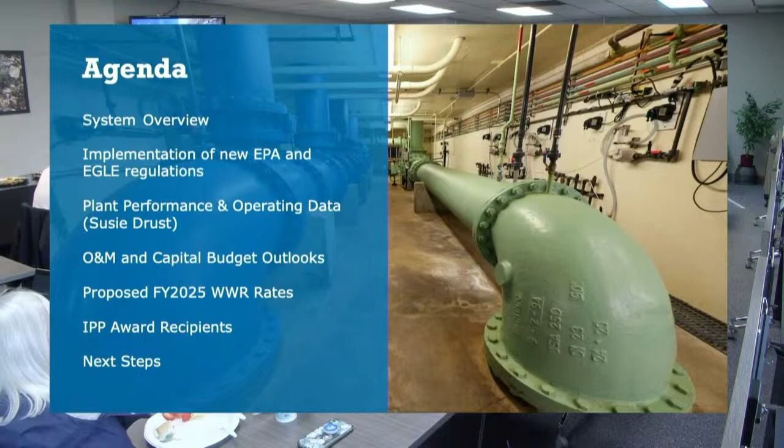So just going into the utility overview, this green polygon on the screen represents the areas that we serve. Many of you here today are your own wholesale entities. You provide service to your own customer base through retail agreements, or retail agreements that you have with others.

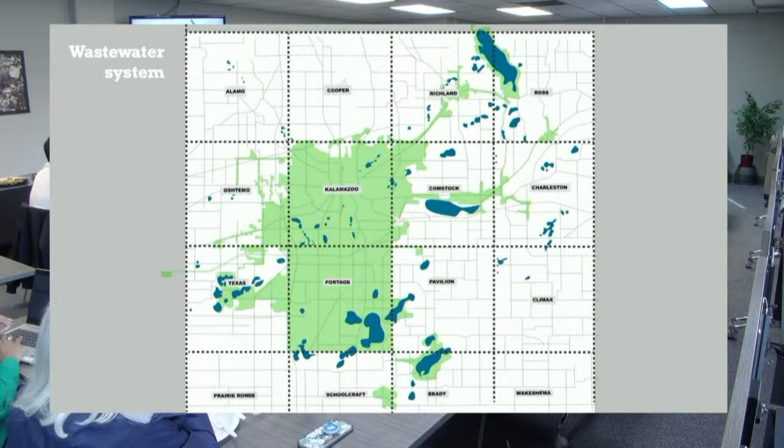So your area may be a green blob on this map. So all the green blobs on this map all come to this site, where we're all sitting here today, for treatment.

This plant is unique. It is the only plant in the state of Michigan that has powdered activated carbon treatment. This plant was specifically designed and built to handle the type of waste streams that it receives.

So there's a lot of unique characteristics there. This plant also has an EPA exemption for pharmaceutical waste that provides us the ability to treat that.

So every hour, 24/7, 7 days a week, 365, including Christmas Day, there's a million gallons of wastewater coming through the door of this facility.

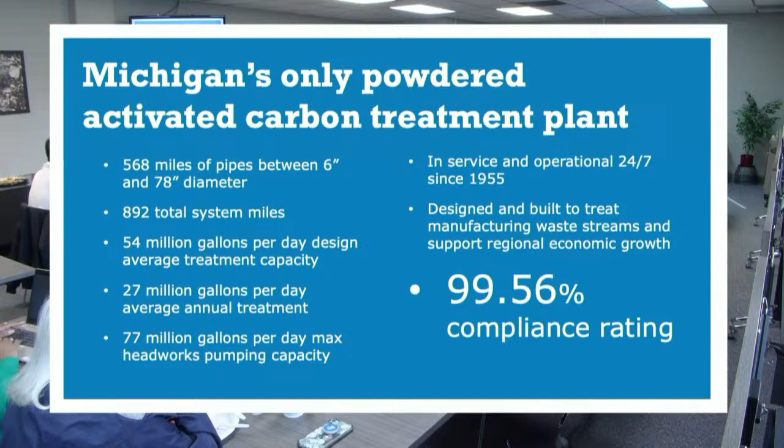And so that's really going to speak to a lot of the reliability and operational performance criteria that we've got to make sure that we're meeting, so that we can treat those waste streams.

And so that we can treat it to the highest regulation requirements and treat it and provide it to the Kalamazoo River.

In terms of system capacity, we're going to talk quite a lot about this. This has been something that's a bit of a changing landscape for us. We're actually going through an evolution now through changes with our permit and changes with EGLE.

We're moving away from our historic kind of hydraulic nameplate capacity, and we're getting into capacity of individual pollutant parameters. We're getting into treatment capacities of pollutants and specific capacities for things in our sewer use ordinance.

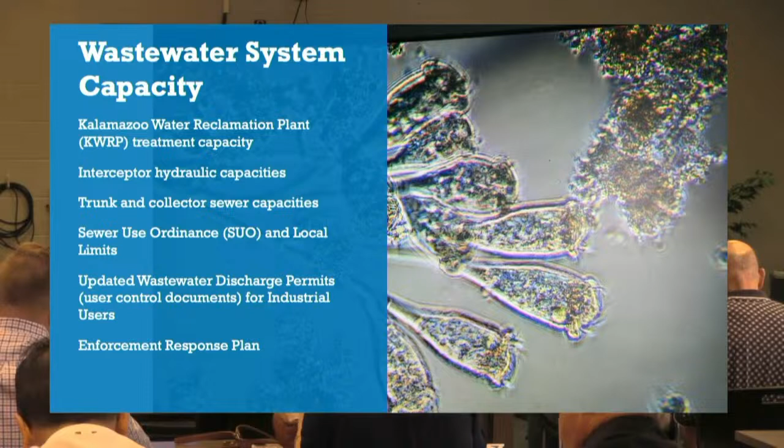So we're going to kind of go through that and kind of walk through that so there's some broad understanding by everybody.

Going back in time, back to 2017, we were issued a new permit, and that new permit required several things. It required, first and foremost, that the City of Kalamazoo conduct a MAHL study and that we incorporate a MAIL.

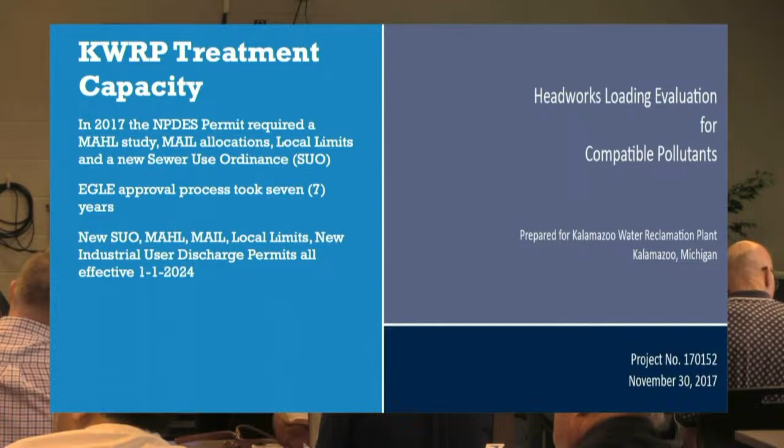So that was a maximum allowable headworks and loading study that had to be incorporated, and then that MAHL then informs the MAIL. The MAIL is the maximum allowable industrial loading.

So if you think of it like a pie, essentially what EGLE is saying is that the whole pie is going to come into your facility. That's going to get regulated and controlled.

And then of that pie, you've got pieces for what we call background, which is our residential customer base, quite often referred to as our retail customer base.

And then we have industrial loadings, which are our big industries, and then our septage customers. So those slices of those pies are limited, and they're limited based on our performance and study.

Getting into some background of that, the way the plant's configured today has had a few modifications to it, but broadly speaking, we're the same plant that went through a basis of design back in 1979, and went through actual engineering design in 1978.

During those original designs, we had loading parameters that we established and based our treatment capabilities on. With the MAHL study, a lot of these things changed, and so we ended up getting down to an enforceable MAIL of only 168,000 pounds for BOD.

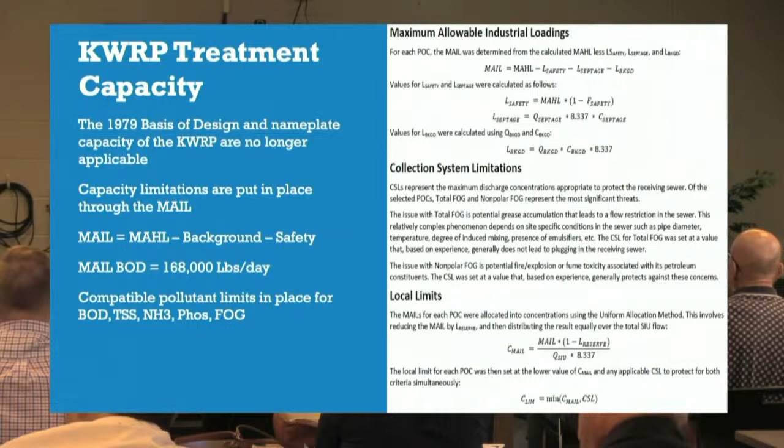Now, all compatible pollutants were updated.

Those industries that are here today, you see those in your new permits, and we're going to be talking about some of that. But broadly, there's been a major change from where we are from nameplate capacity to where we operate today, looking at capacities in each pollutant parameter. So one of the things to highlight: 53.5 million gallons per day, that's our nameplate capacity. We're currently sitting at about 27 million gallons per day of actual flow that comes in our door.

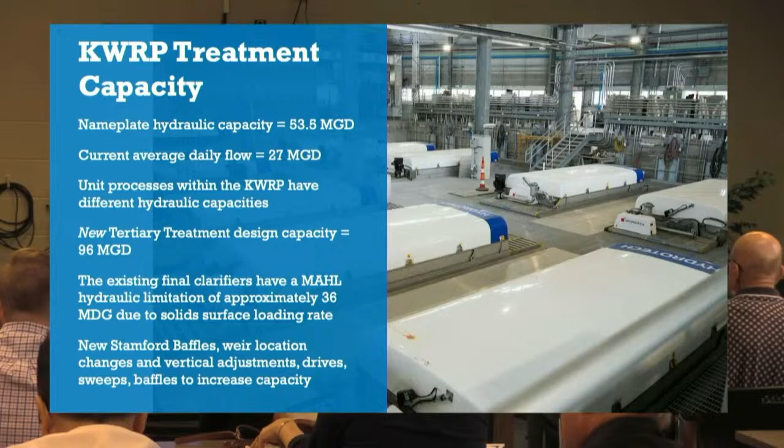We just completed, and you can see the building behind us, a new tertiary treatment system. That's a picture of it there behind us. That system was built to withstand a hydraulic flow rate of 96 million gallons per day. So you can see we're maintaining and enhancing our hydraulic capacities, and we're having to do that because our organic loadings are much higher. We've got some additional projects we'll talk about in the capital plan that will help bring up those loadings so that we can restore and reestablish some higher levels into the future.

We also want to touch on wholesale industries and our townships. We have IJAs, interjurisdictional agreements. Those agreements are essentially in the process of getting rewritten. We've got a requirement from EPA to rewrite those. We also have been working with a group of our township folks represented by the Regional Commission that are helping us negotiate new long-term agreements.

Those agreements are well through the process, and we wanted to highlight that flow and loading is not a limit of those agreements. So those agreements do not limit loading, they do not limit flow. Flow and loading are limited by the physical capacity of pipe in the system and where your discharge point is. However, industries are regulated by that.

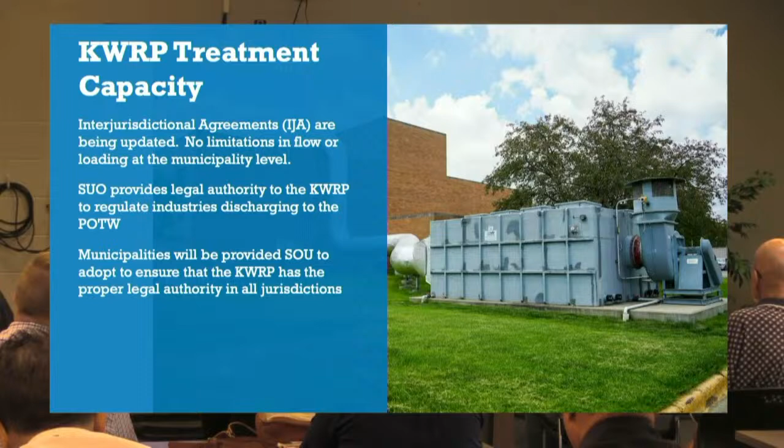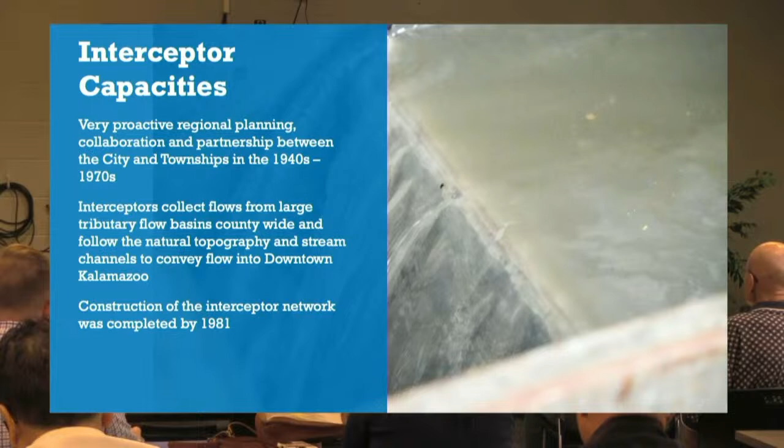We have a vast interceptor network that was built through a lot of great partnerships by many of the communities sitting here today, many of the townships, also supported by Kalamazoo Board of Public Works. That interceptor network was built from the 1940s and completed in 1981. It remains extremely strong and viable for future flows. In fact, that interceptor network flow capacity is greater than our pump capacity. We've got an ability to pump 77 million gallons per day here at this facility, and one of those interceptors can flow more than that.

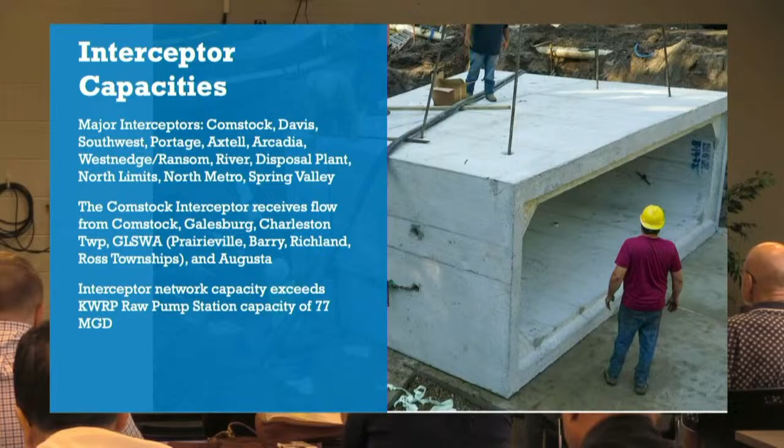The river interceptor, at half full or a third full, can flow something like 54 million gallons per day. We saved you from having to look at it, but we've got a spreadsheet that shows all the interceptor capacities throughout the entire system. We're nowhere close to exceeding that. That's good news in terms of capacity and future capacity of both our industrial users and our wholesale providers.

Some of the tools we've got in place to help monitor that interceptor network is a real-time smart sewer system. We'll be sharing logins and how to access the system. Your engineers are really going to be excited by this program. We spent about 3 years developing this, and we've got sensors in manholes all throughout the system. Those sensors monitor flow—you've got a pipe, you know the diameter of the pipe, and you know the grade of the pipe, meaning the angle it's sitting at.

And we measure the flow. We can tell you how much flow is in that pipe, the height of flow, by using Manning's equation. Not 100% accurate, but it's as accurate as most engineers get in terms of monitoring flow in gravity sewers. It's a great way to check on the system and monitor it in real time. That system is now running in the background, and it will alert our engineers and staff if we have an area where we see a blockage occurring.

We responded to a blockage of the southwest interceptor along a railroad and low-lying environmental concern area, which was a swamp—something we don't want to have sewer overflows go into. We were able to go out there and remove the blockage before it became an overflow.

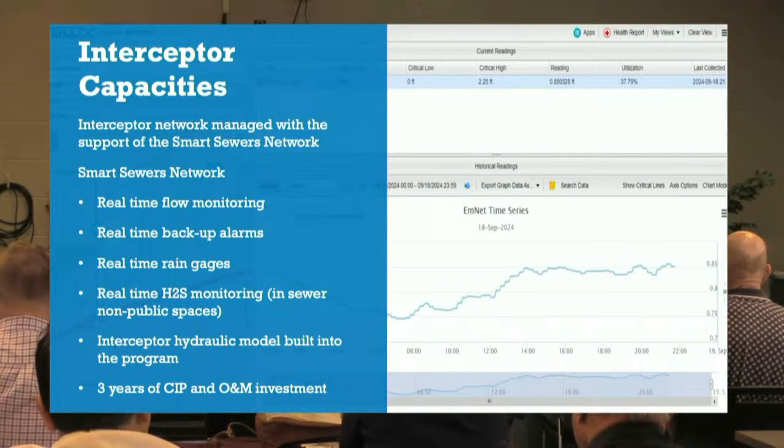That can really help in real time when we're looking at flows that are coming in, high flows at lift stations. It can also help us in future planning as our engineers are looking at spatial distributions of rainfall within our area. If you're into rainfall, if you're into weather, you'll know that Kalamazoo as a county doesn't always receive the same amount of rain over the same area. That rain can be really variable throughout the storm events.

So overall, this system has been extremely beneficial for us. We continue to learn new features of it and employ new features of it, and it's something we're going to be sharing with our engineering partners in the townships as well as we continue to roll that out.

Another program that we have, just to touch on it, your regular 8-inch sewer that's down some road somewhere, that sewer's got a finite capacity just based on its size, and we've got a program over on the water side of upsizing.

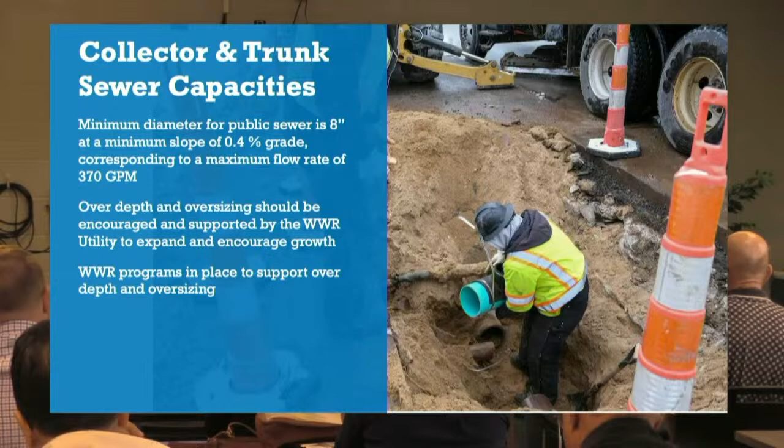We also have this program in sewer. This is a program that we're also going to be pushing with our partners in the townships, that if you're planning an area that is going to experience changes in zoning in the future, maybe that area is going to become a commercial area, we should talk about considering going deeper with your sewer and maybe going larger diameter with your sewer so that you can serve more customers in the future.

So kind of bringing it back to that term regulated capacity, we had a whole host of regulatory enforcement actions that took place in cooperation with EPA and EGLE. That all went into effect on January 1st of 2024.

So we've got a new sewer use ordinance, and if you look at our new ordinance compared to our previous one, our previous ordinance was about 30 pages. Our new ordinance is about 180 pages, I think. So it's quite a difference.

That then opened the door to establish new local limits. We've got new dewatering discharge sampling requirements as well. PFAS has been a big issue for everybody. We now regulate and control how much PFAS you can put into the sewer system.

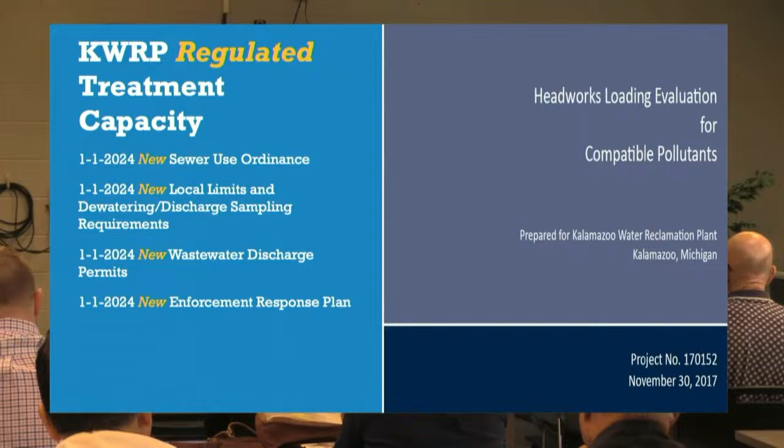We have a PFAS limit here for our headworks loading. We're only allowed to load the headworks with so much PFAS, which means that we can only put so much PFAS in the pipeline. We just built a new GPI pipeline between us and GPI. That was a $3 million pipeline.

We got the results back for dewatering the analytical and discovered that there's PFAS above our headworks loading limit. We had to bring in a temporary filtration system with GAC treatment to dewater to support that project. That added another $1.4 million to the project. So a $3 million pipeline became a $4.4 million pipeline just because of PFAS regulations.

And I know that's happening, that those kind of things are going to happen to industries as you guys look to expand, and that thing's going to happen continually in construction in areas that are building in brownfield areas or building in contaminated areas.

New wastewater discharge permits, so everybody here on the industry side of the house is operating under either a brand new permit or a permit that's going to get superseded by a brand new permit, which will have new requirements. There's a whole new set of requirements for slug discharge control plans, for spill response plans.

Some of these things are very different. Some of you industries have been with us as long as you've been in industries and have been doing it the way that we've used to do it for 40 or more years, and that's all changing now. So this has been a very steep learning curve for many of us, and we're continuing to get through it together.

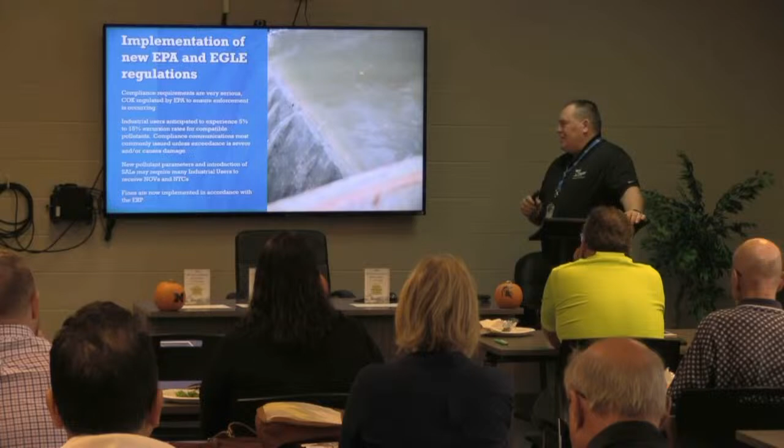We also have our new enforcement response plan, which provides guidance on equalized enforcement across all the different industries based on what type of situation it is.

One of the things we wanted to highlight in terms of compatible pollutants is that most every industry was designed based on our limitation of MAIL. If you remember, our MAIL, maximum allowable industrial loading for headworks for BOD, was 168,000 pounds. So that's not a lot.

That's getting spread pretty thin across all the industries. And that same story goes for solids, ammonia, and what's going to happen in 2025 is phosphorus. That's already in your permits, so that's getting regulated right now. So those limits are spread thin, and we anticipate that most industries will have somewhere between a 5 and 15% excursion rate on many of those things.

So most excursions, if it's a compatible pollutant and it's non-severe, so there's no impact, no harm, those are usually handled with what we call compliance communication. If there is an exceedance that's severe, or that exceedance causes damage or harm, then that compliance communication would be a NOV, a notice of violation.

We've got all those new pollutant parameters that we talked about. Some of those are requiring SALs. You might have an industry like a metal finisher that now has a limitation for phosphorus. They didn't before, and now they're having to have an SAL, which is a special allocation for loading.

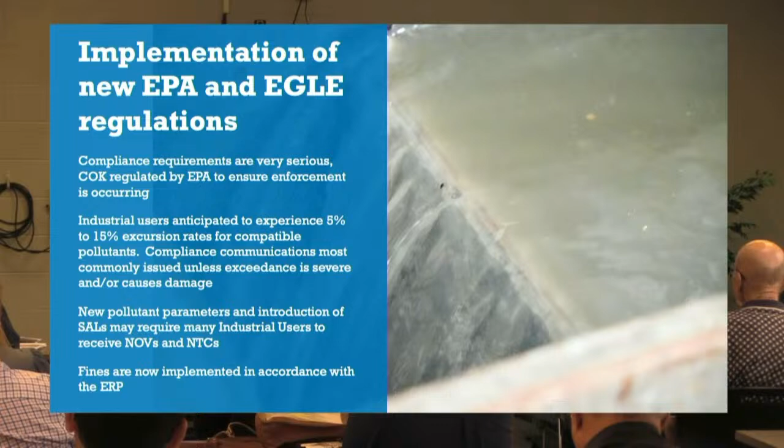Our minimum fine is $10,000. We usually always try to fine in abeyance. So if you get a fine in abeyance, that means we're going to hold that fine and suspend it while you conduct action in your NTC.

So you've got a notice to correct that says we need you to install a meter, or submit some reports, or do some sort of action. If you complete that action, then that fine is not administered. We also have industries that were unable to meet that requirement, and so that fine did get administered.

Jumping over to some O&M and capital budget outlooks, we want to talk about what are some things that we've been working on at a higher level with some of our other partners. I'm talking a little bit here about our rate negotiations that we've been working on with our regional commission.

So there's some fundamentals that we're working towards, and some of those are an equalized rate concept, embracing regional cooperation, looking at this instead of 22 independent systems. We really try to look at it as one broad system with one common goal.

Our common goals are to provide clean, safe treatment, so that we're protecting the environment. Ultimately, that treatment is what we're after. We're also after following EPA regulations on the industries and everything else, and then just kind of that simplified process for providing that service to the public.

And if we look at this as a system and we embrace the concept of broad economic growth as a region, we can really look at having a goal of long-term economic stability and growth across entire Kalamazoo County.

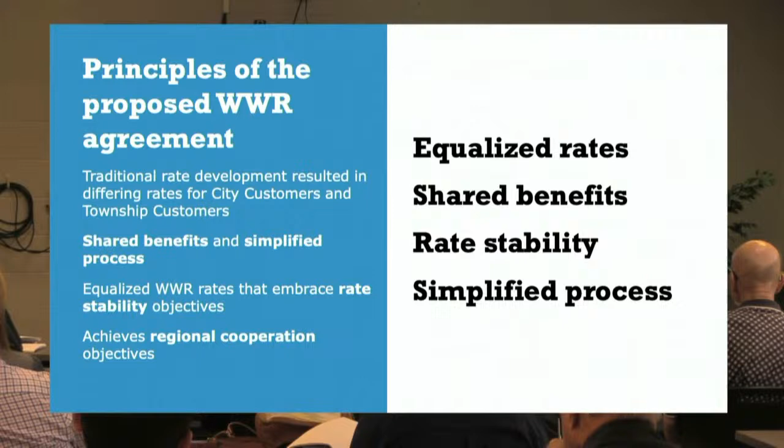So there's a lot of words on the screen here. I'm not going to read them to you. This information is taken right from the rate report.

It really talks about these three main concepts in rates that have been kind of controlling things. One is where we allocate costs for collection systems, and we're providing some updates on that. The other key concept is what we talked about, an equal rate concept of providing the same level of treatment for everybody, and then embracing that concept across all the user classifications.

So we talked about we have retail users, in-city and out-city folks that participate in retail. We have this group, largely represented by wholesale service providers and retail service providers to others, wholesale to us, retail to others, and industrial users. These same concepts are being applied across everybody. And then the other concept within that is the concept of rate of return.

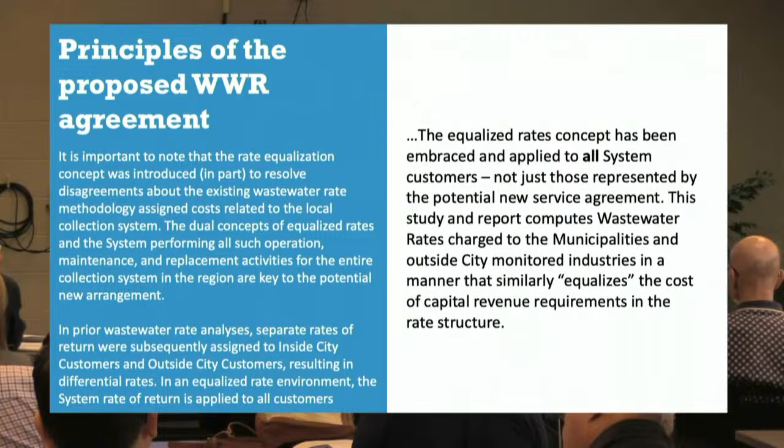If you take the rate of return requirement and spread that out across the entire system, it provides broad system benefits, as opposed to a rate of return requirement only on a certain customer class, so that it provides better equity across that system. Those are the rate fundamental changes we're working on that will help the overall system create this concept of equalized rates and a regional approach to the service we provide.

Drilling into some specific areas of level of service, we see chemicals, including odor control, are really starting to increase. We're spending upwards of between $5 and $6 million a year on chemicals now. If we go back to 2018, that number was closer to about $1.5 million a year. Odor control is a big portion of that.

We've got new carbon scrubber units that are part of all the processes here in wastewater. That was an upgrade we made a few years ago, and we continue to support that with annual investments and carbon changeouts. Changing that carbon out costs $600,000 annually to refresh that carbon. So that's one component of that.

Sludge disposal, we're going to talk some more about that as we go through the slides. That has been something that continues to increase year over year. Again, if we go back to 2018, we were looking at $4.5 million a year on that. That contract stayed with us through 2020, and then we've been jumping ever since.

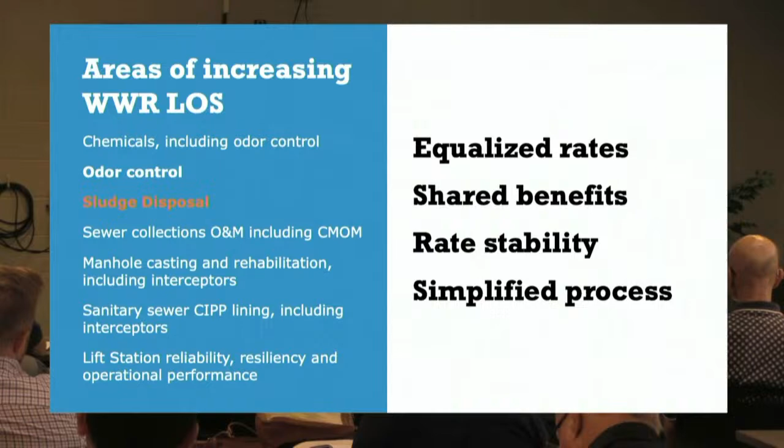Some other work, really kind of focusing on those sewer collection systems. We take all of our systems and add them all together. We've got about 900 miles of sewer pipe in the ground out there. So that smart sewer system helps us keep an eye on that. We know that folks in your own retail areas are providing an eye on your stuff. And with our agreements with the townships, we're going to be doing some sanitary sewer lining and a lot of rehab work on that in years to come.

One of the things we wanted to show you is where the work is occurring right now, and we ask ourselves this question all the time. We've got over 15,000 assets in the asset management system in Blue City. We've got work orders every day. The TOSs in the room can talk about how many work orders we do and how many are assigned to the different units. There's a lot of data and information out there that can be overwhelming at times.

One of the other things we realize is that we all drive vehicles to go to work assignments. Nobody walks out to Augusta to check on the lift station. We take a vehicle, and every one of our vehicles is coded by department and GPS to the driver. So we can go to our GPS system and look at where our vehicles are going on a yearly basis.

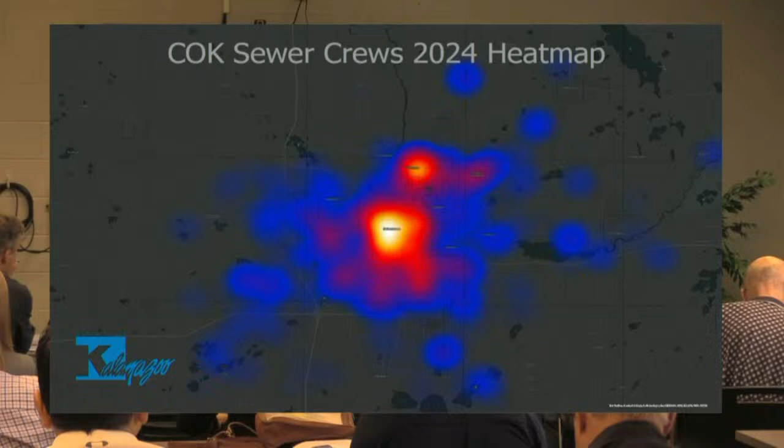So this image is a heat map. This shows you all of our 4-dash vehicles, which are owned by and assigned to the sewer department. This is everything from Badgers to pickup trucks, it's got a 4-dash number on it. So you can see it's got some heat signatures of where that work's happening. You see we've got strong representation in kind of the core city, downtown.

We're up in the north side, this is section 10, this is section 15, down here section 26. These are kind of known areas for older sewers, clay sewers, and roots. These are heavy tree-producing areas. We're up here in Parchment quite a bit, and then you kind of see dots where we're out touching everybody. You can see we're lighting up areas. Most of those areas where we're lighting up are lift stations or areas like where interceptors are, areas where we're out doing direct work.

So we actually got one of these infographics for our streets department, we've got it for our sewer department, we've got it for our water department, so we're able to look at, from an annualized basis, where that work is occurring, just from a high-level snapshot of what's going on. We do have home base here at the Harrison facility, and there's a home base at the Stockbridge facility. We deleted all those endpoint trips from this overlay so that won't skew the data. These are actual trips, except for Harrison and except for Stockbridge.

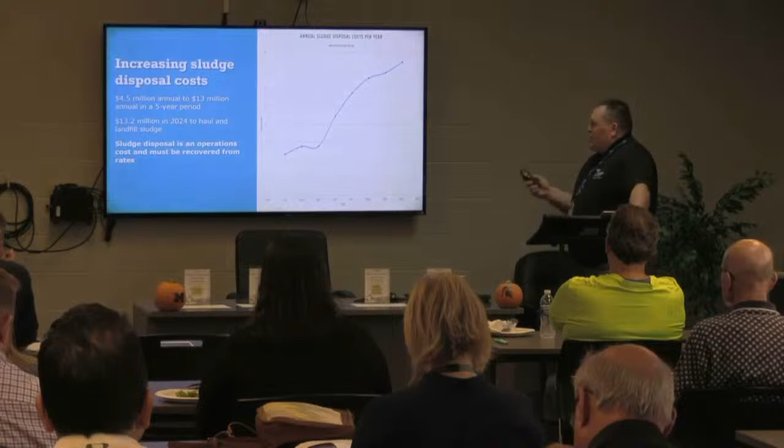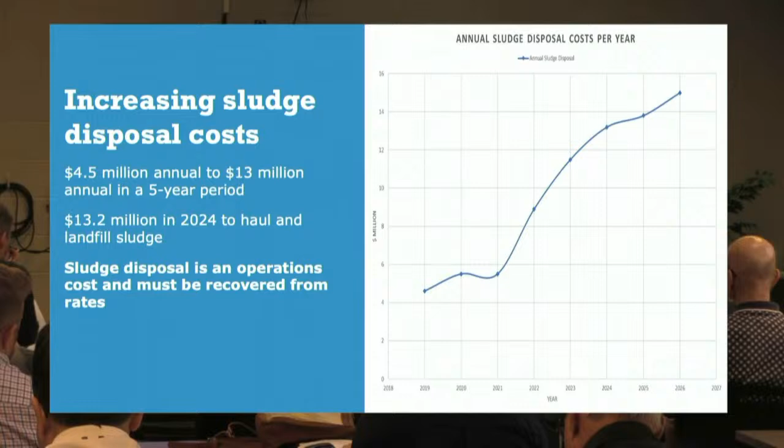Getting back to sludge, we're up to $13.2 million a year last year. That number is even going up. That's an operational number, meaning every year we're going to have $13 million come in just to deal with sludge disposal. We've been working on a process to really get after a new plan for sludge disposal. We've got our Sustainable Biosolids Committee, and we've got a good governance group working on that. That group is going to meet again on November 13th.

Essentially we had 30 technologies that submitted to our RFP, so we worked first last year to narrow that down. We got that down to 3 different technologies. We've been doing some homework on those technologies to provide better understanding of cost, better understanding of capability, and better understanding of emissions requirements in terms of what we're going to have to add to that equipment to ensure we're at zero discharge for any kind of polluting parameters into the atmosphere.

We're going to meet again and come out of this meeting and provide some updates. But where we're really going towards this, right now, we manage a wet product. So we have liquid sludge. That liquid sludge goes through a centrifuge process. Susie's going to talk a little bit more about that. And then we dry that out.

We're, on our best day, still only drying to 23, 24% solids, which means there's 77 to 76% water that we're hauling. We're storing all that wet material on our site. We're consolidating all that wet material on our site, and we're transporting all that wet material through our neighborhood. So we know that we've got to transition to managing, transporting, and consolidating a dry material - a dry material that's free from odor, free from any sort of vaporization or anything like that it can give off.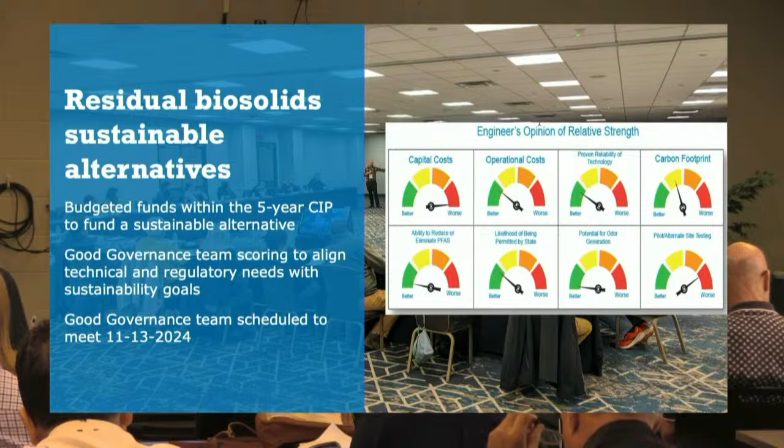Some other capital improvement focus that we have - we're really going to be looking at lift stations. We've got a whole new panel design. We're taking the panels and putting them out at many different lift stations. I know Charleston's got some new panels. We've got 65 lift stations in the system, so they're all getting new panels.

We're working towards getting generators at every single lift station. We went through the ice storm in 2023 - we had a real strong realization that we only have 3 licensed electricians on staff. And so for us to send a licensed electrician back to the staff, if I've got a lift station down in Texas and I've got a lift station down in Augusta, there's a lot of driving that has to occur to get that electrician between those stations.

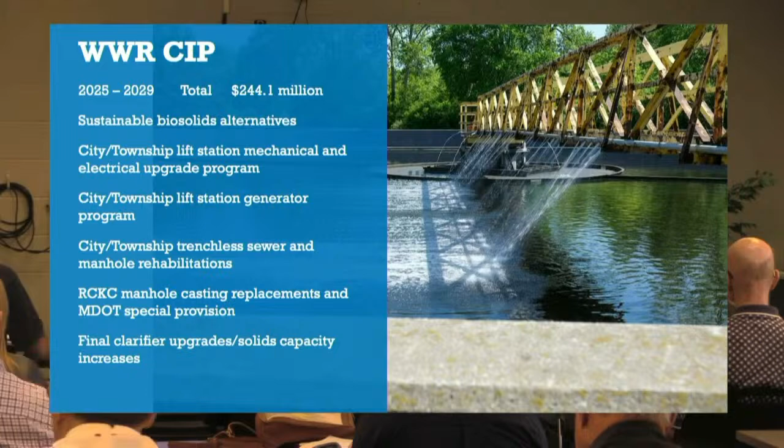And so if we can get stations to operate reliably by themselves without a lot of input from our electricians, then that's going to provide overall reliability to our system, and then our electricians can stay here in the plant and focus on the big picture aspect of keeping SCADA up and running and keeping the treatment plant up and running. So getting into rates here,

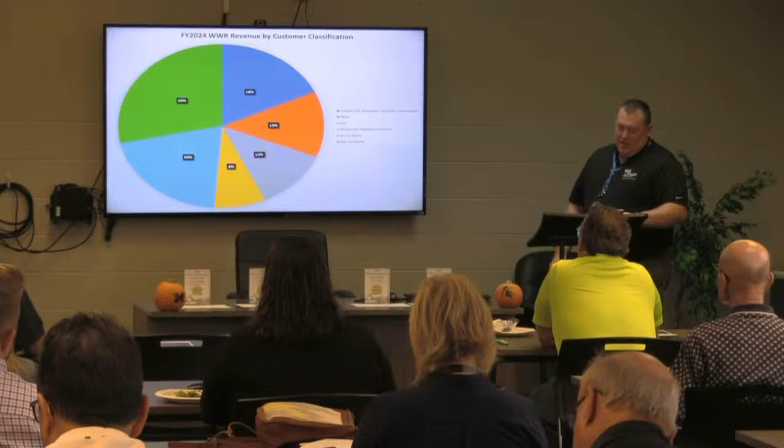We wanted to share with you this pie chart. It's broken up into all the different pieces. Broadly speaking, everybody that's in the room today represents about 51% of our revenue requirement. We've got GPI and Pfizer together representing 25% of our revenue requirement. We add in the wholesale communities like Gull Lake Sewer and Water, Vicksburg, Portage, those folks - that brings in another 18% of that represented class. And then we've got the remaining industries that bring up about 8%. All summed total, it's about 51% of the revenue, leaving 49% of the revenue to all the retail organizations, which would be City Kalamazoo retail, and then all the townships that represent our retail communities.

What does your rate pay for? This summarizes our 3 buckets of cost: treatment, collections - which we call local collections or local collector sewers - and then we have the interceptors. In terms of this group, which is largely those wholesale communities, everybody pays for treatment and everybody pays for interceptors. Now, if you're an industry and you're located just in town and you're in one of the retail areas, you would also pay for the local collector sewer. And if you're an industry and you live in the city, you'd also pay for that retail aspect of it as well. In total, it's about $40 million of cost.

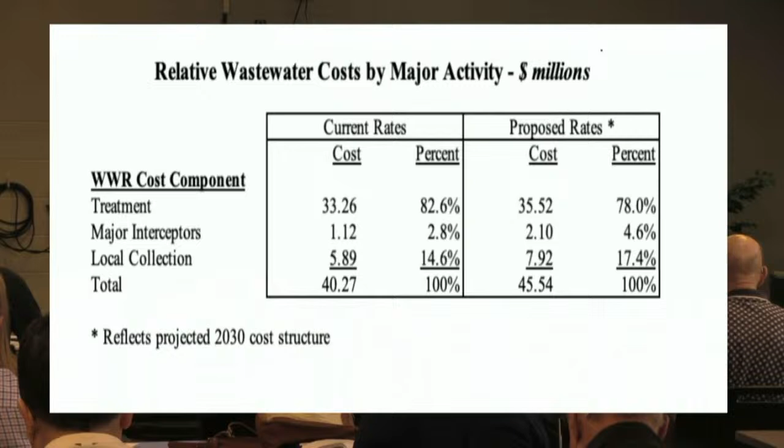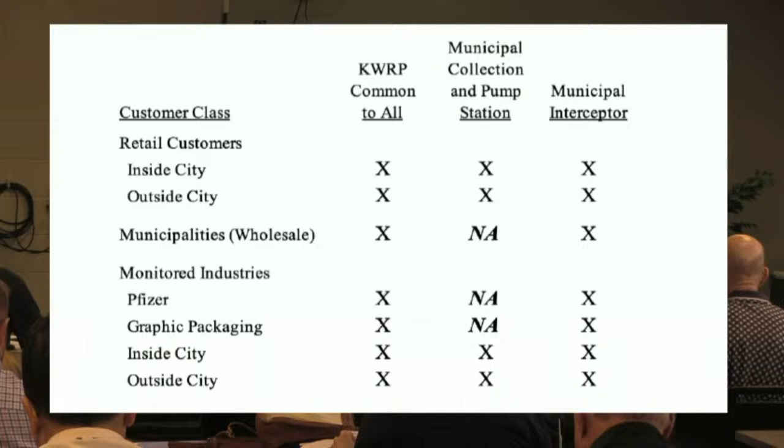We calculate this based on the removal performance of each one of those, talking about it from the operations perspective. Within our budget, we've got an operations portion assigned to treatment. We know these are kind of the main goals of treatment. We can go through each unit process and see how it performs using actual empirical data of removals, and those removals then tie back to actual costs. So we've got that shown.

We've had major changes in cost allocations over the last, I'll say 6 years. If we go back to when solids disposal was $4 million a year, some years $3 million, when we ran filter presses, we didn't have a lot of costs with solids in the grand scheme of things. Today we're on centrifuges with sludge disposal costs pushing $14 million a year — much higher. So those costs are starting to shift from where they were hydraulically centered, now towards being more focused on individual parameters.

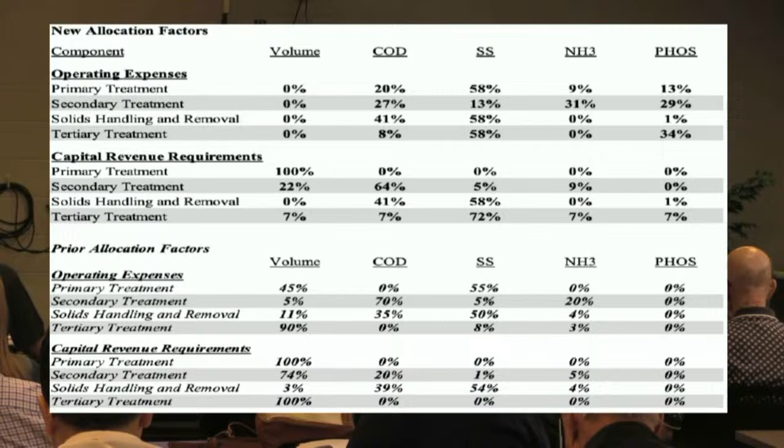So early on we talked about rate methodology changes, and how those changes were really goal-driven for an equalized rate concept across all customer classifications.

We talked about major changes in level of service and how that's driving costs in chemicals and sludge disposal. We talked about future reduction in operating revenue because we're going to build a sustainable biosolids solution so we can transition from managing a wet product to managing a dry product. When we do that, we're going to realize dramatic reductions in operational costs. We'll have capital costs, but those are spread out over a bonded period, whereas operational costs are unique right now.

So those are changes. We also have overall changes in operational and capital cost allocation factors — just talked about that, that's this sheet right here. And then changes in customer classification, proportional use, and distribution.

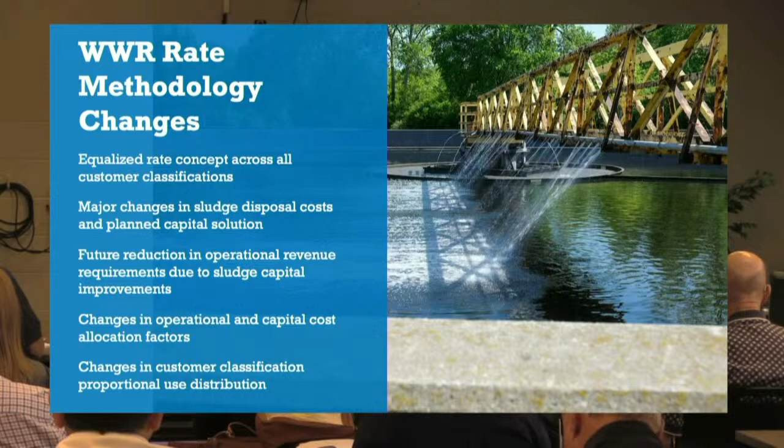That's what we talked about two slides previous, where you can kind of find yourself, municipal provider, what products are offered. Everyone gets treatment, everybody gets collections, or sorry, everybody gets the interceptors. So we throw all that on the wall and go to calculate rates for next year.

We get some numbers we might not like, and some of that is due to those changes. When we first did this, we calculated a rate increase for City of Portage, I think it was like a 46% increase. And we said, well, Hender's not going to like that. Not to pick on Portage, but that was pretty much across the board for everybody else. Pfizer, GPI, everybody had similar numbers, and so did City of Kalamazoo. We had numbers that were very high double digit.

So we worked with the rate consultant and said, okay, what's going on here? What can we do? And really it came back to, because of all those factors I just talked about, the instability and costs that are really driving operations, mainly due to sludge and all those other factors I listed, just looking one year out doesn't really solve anything. But in time, when that sludge solution is embraced and put into operation, that saves money. So let's go to that year.

So we use what's called a future test case year. We're setting rates in 2025, but we're going to pretend that it's 2030 and set rates for that year. Then we're going to back ourselves out of it year by year by year to get to where we are today. And when we do that, we provide what's called a 6-year glide path. We see a major mellowing of those rates.

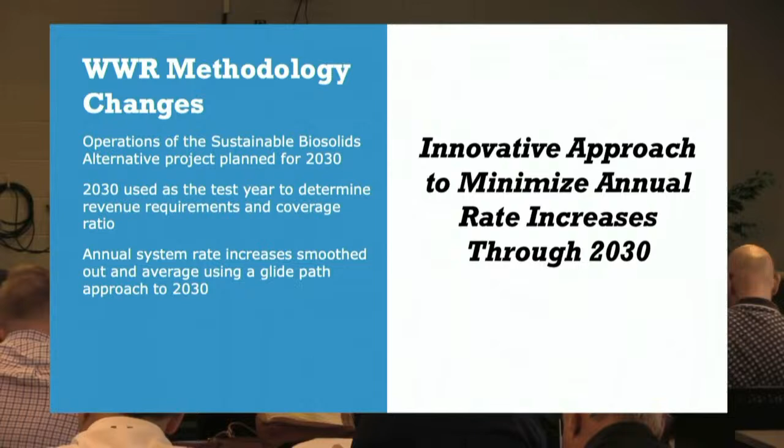I picked on Kendra earlier, so I'll give her the good news. It's down to, what did I say, 11.9? 10.9%. So, you know, great news with that.

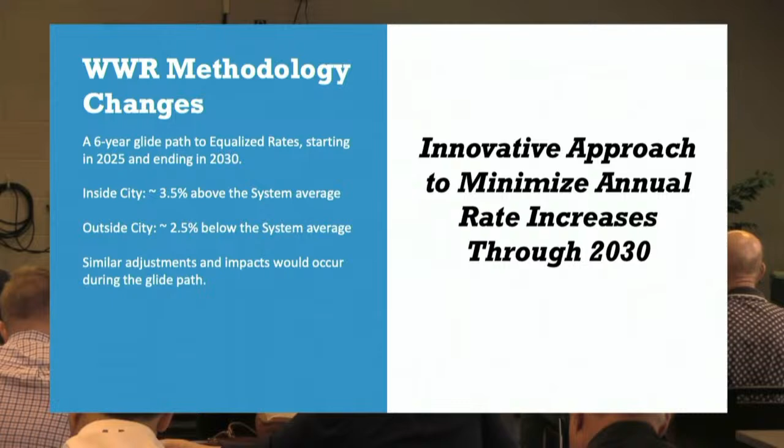Across the top here is that system rate increase. So most of the wholesale users that are in shares, you're impacted by the system rate increase, and then whether your individual flows are going down or up based on your 2-year trend. So if you were looking at a system increase of 12%, and your flows were static, you would have a 12% rate increase. If your system flows were going up, then that would be proportional to that. There is some smoothing between in-city and out-city rate.

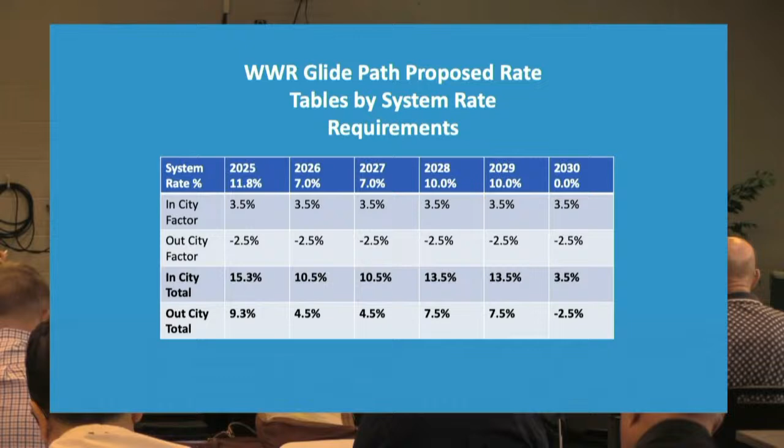You're seeing that. We talked about those retail groups. It's a little bit different cohorts than what's here today, but I appreciate that we may have audiences online that may be interested in that as well. Some smoothing of that occurs due to that overall matching of level of service between retail entities and balancing of those collection costs that we're going to be providing collection services in the township areas as well, and capital investment occurring that's getting balanced across all user bases also.

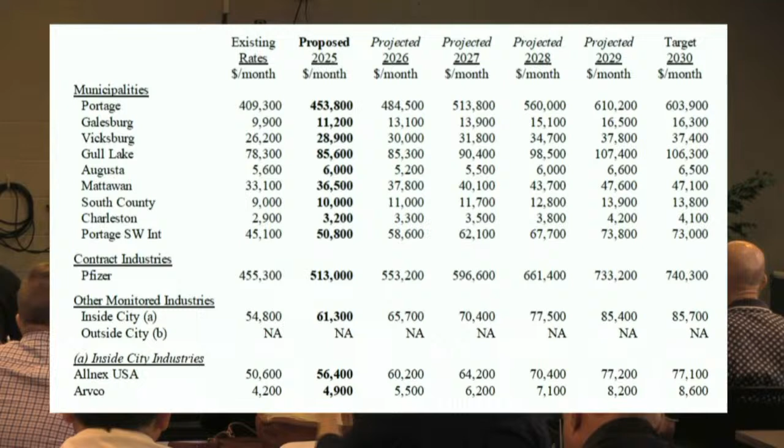So that balances out. You see this is a projection. Everybody should be able to find themselves on this list. That proposed monthly rate is here in bold, and it shows you all the way out to 2030. So a different way to look at it, but this shows you what your actual percent is if you're interested.

Pfizer, 12.7%. Good news, you know, you're right in there, maybe a little bit of a flow increase, but mainly that rate is carried on the system increase, and that's a whole heck of a lot better. We're talking about a 30% increase before - I would have had to give a better lunch if we were talking about a 30% rate increase.

Big winner, I think Augusta, 7.1%. I think we're still working with the flow meter there. Augusta's flow kind of dropped off when we installed a new flow meter. So if that holds true, Augusta's going to kind of go down and stay low. Gull Lake Sewer and Water has been slowly increasing, and every time we put a new flow meter in, it increases. So John probably doesn't want us to put any more flow meters out there.

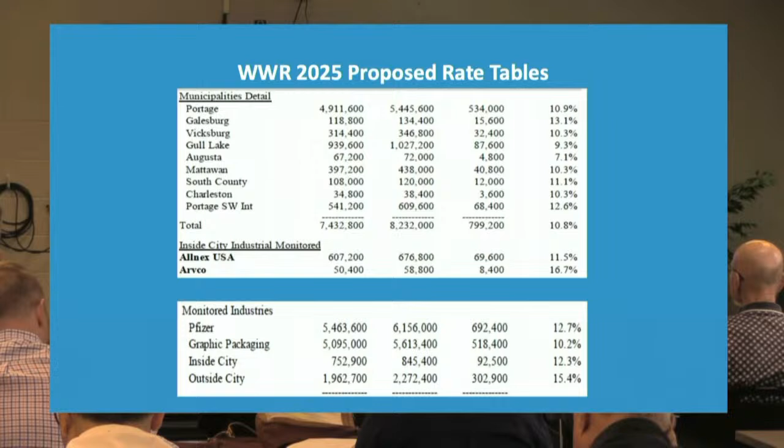Mattawan's been increasing, Vicksburg's been increasing. We're seeing that there are areas in the county that are getting housing increases where flows are starting to go up. Nothing big, but proportional with growth, and overall, probably good news.

Again, this is good news. It's a good news conversation. I know that looking at 10% rate increases is probably never good news for anybody. But if we really look at the investment that we're planning, we've got a $300 million capital improvement program that we're focusing on over the next 5 years. This really is a good news program.

Just a quick update on shares. I know I'm kind of running out of time here. Municipalities will continue to stay in shares. There's not going to be any open enrollment for shares in 2025. So if you're in shares right now, you're going to stay in shares. If you're not in shares, we'll keep you out of shares.

For the city, in actual dollars and cents, what does this all translate to? We showed the monthly numbers for the big wholesale users, but it's helpful to understand what this means for a typical customer. A typical in-city customer sees about a $3.60 a month increase, and for a typical township customer, it's about $3.04 a month.

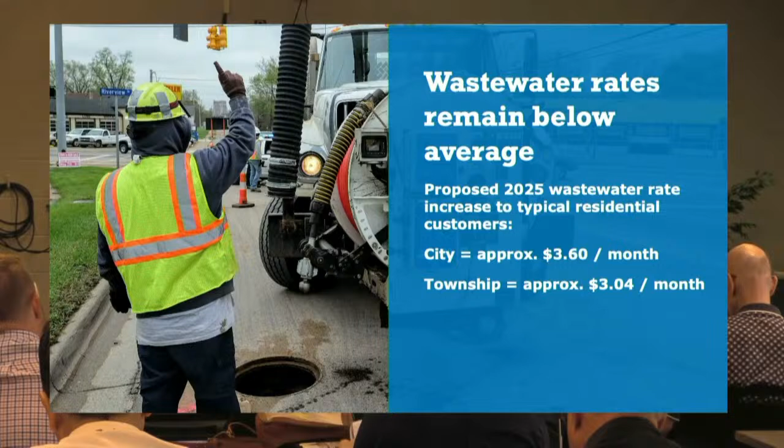Where does this put us with respect to other Michigan peer communities? Again, below average. We go from the actual lowest in the state to still the lowest in the state. For our out-city groups, we shuffle a little between us and Wyoming, there's been about a 5-year race over who has the lowest sewer rate in the state.

I know we're talking about a bill we have to pay, and I know no one's happy that it's going up, broadly speaking 10 or 12% across the system. But in terms of the investment in the system and the benefit it provides, overall this is really pretty positive news.

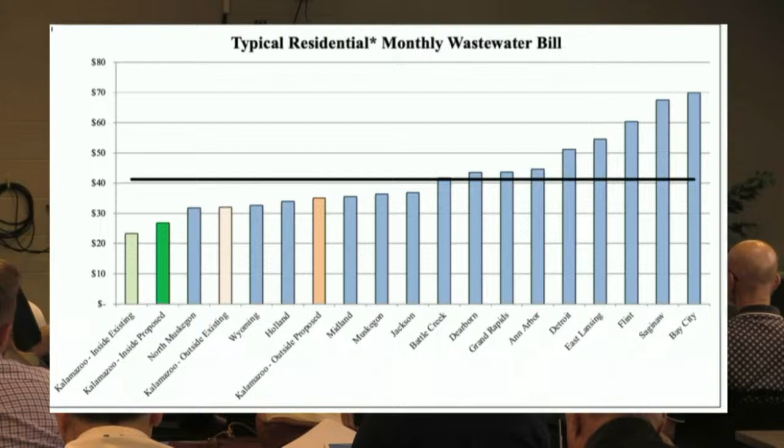Early on, I said we're going to recognize some industries for the great work everybody's been doing. We want to recognize you in front of your peers. So we wanted to recognize Bell's Brewing for outstanding compliance. Bell's, if you want to come up here and get your award.

Thank you very much, guys. Bell's has done an amazing job, and we just want to talk positively about rolling through all those new changes in permit. Bell's has quite an operation out there, a lot going on any given day, and all those new parameters definitely apply to Bell's. They've been able to make it through, make the limits, not get any NOVs, and keep their heads above water in terms of compliance, and have done an amazing job with all the programs right now. So thank you very much.

For outstanding communication, we've got 2 awards for Zoetis because they have 4 buildings. We strive for math out here and our ability to divide. Is everybody from Zoetis? Come up.

We'll have to share. The goal was to get Zoetis awards for all their facilities, but we could only get 2 for right now, so they're on that. Thank you very, very much. Again, Zoetis, wonderful job, multiple facilities, multiple different permit parameters, things like a farm. That's just a wild operation out there, and great communication with these folks. It was really appreciated by our team. We really want to thank you, and again, great job. Thank you very much for all your great work.

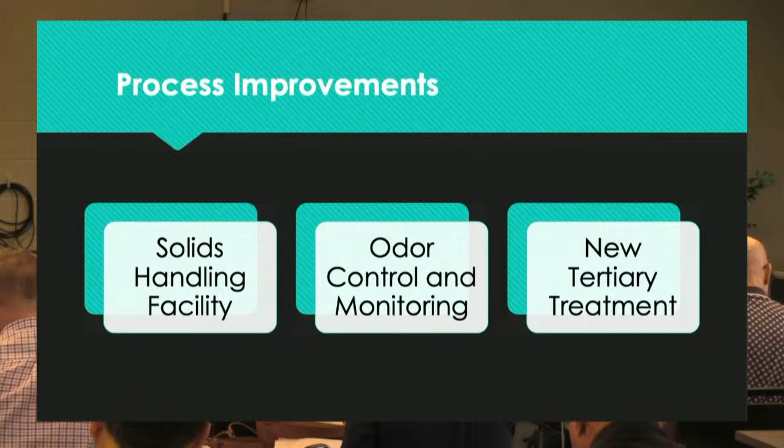James spoke a lot to you about landfill costs. Some of the driving factors for process improvements to the solids handling facility were the increased cost of biosolids hauling, as well as material requirements of the landfill. Landfills require a certain quality of material for slope stability, and since we handle a wet product, our solids were too wet — we didn't meet that slope stability standard. So we knew we needed to increase the total solids percentage leaving our facility.

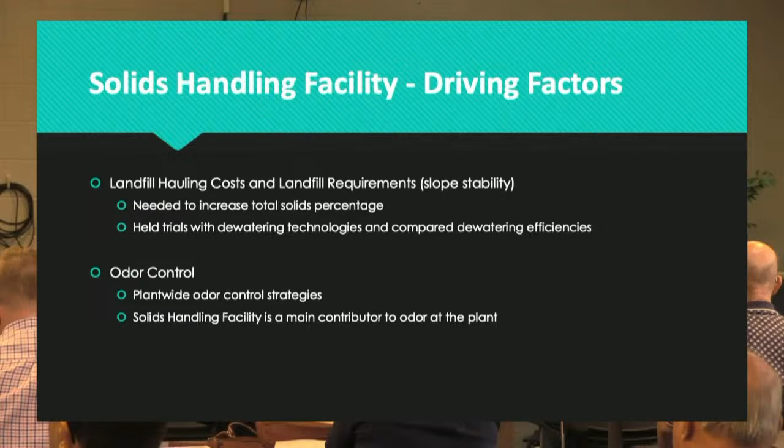We held trials and pilots of different dewatering technologies and compared the dewatering efficiencies. Another significant driving factor for the solids handling improvements was odor control. We're in the process of implementing plant-wide odor control strategies, and we'll get into that a little bit later. The solids handling facility is one of the main contributors to odor at the wastewater plant, and we recognize that.

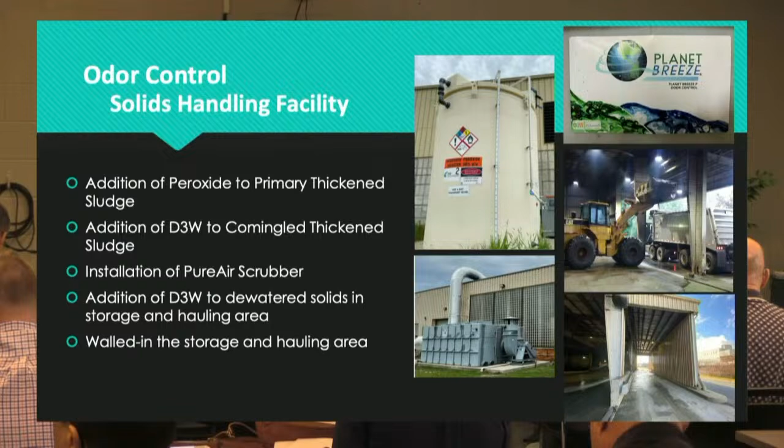In 2019, we were getting about 18.56 parts per billion hydrogen sulfide in this sludge storage area. Now, as we're piloting and implementing new odor control practices throughout the years, we're seeing the averages of hydrogen sulfide in this storage location declining.

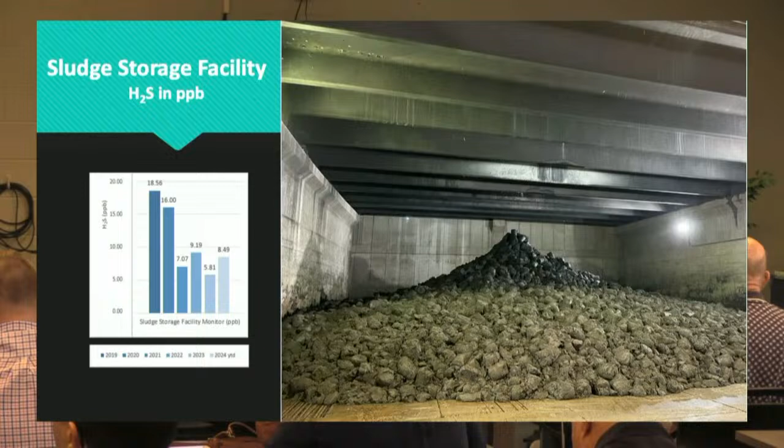In terms of plant-wide odor control, we have these units at five target locations throughout the wastewater plant. They're PureAir scrubbers, installed in 2021. These pull air from within specific buildings through an engineered media impregnated with carbon and permanganate to trap those odor-causing molecules.

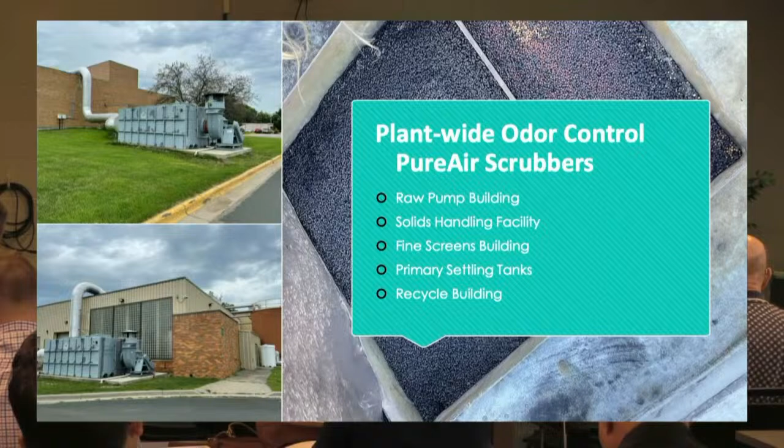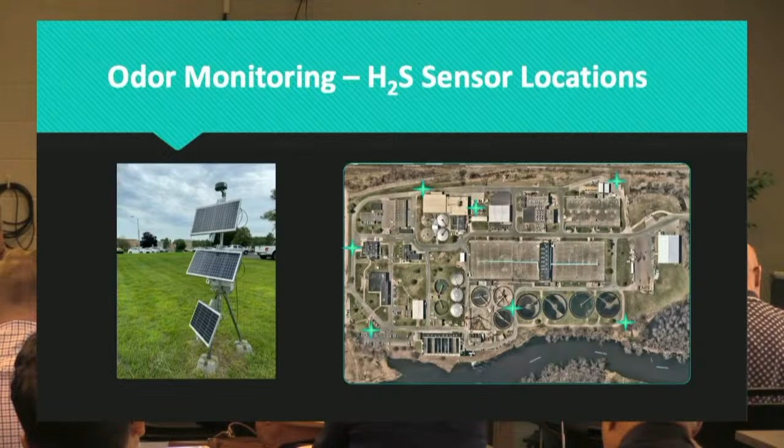You might be wondering how we monitor and collect all of our odor data for hydrogen sulfide. These readings come from seven solar-powered sensors like this, situated strategically throughout the treatment plant. We monitor these sensors in real time on the EnviroSuite monitoring system, which will alert our treatment operations supervisors on shift via email if an odor monitor exceeds a custom set threshold. That allows us to investigate the source of the odor and take action to resolve the problem.

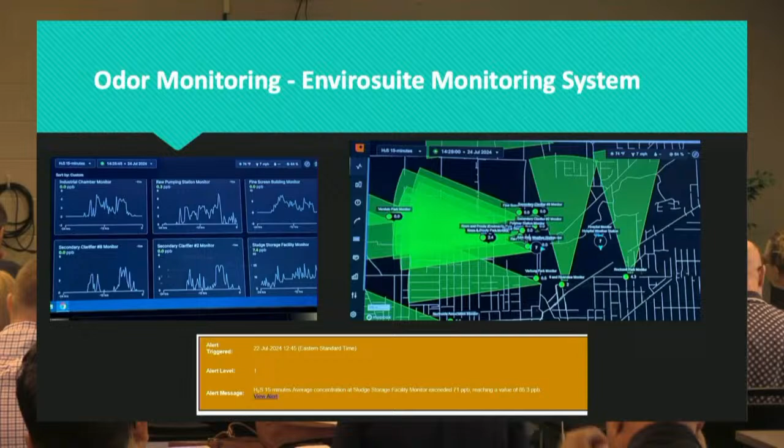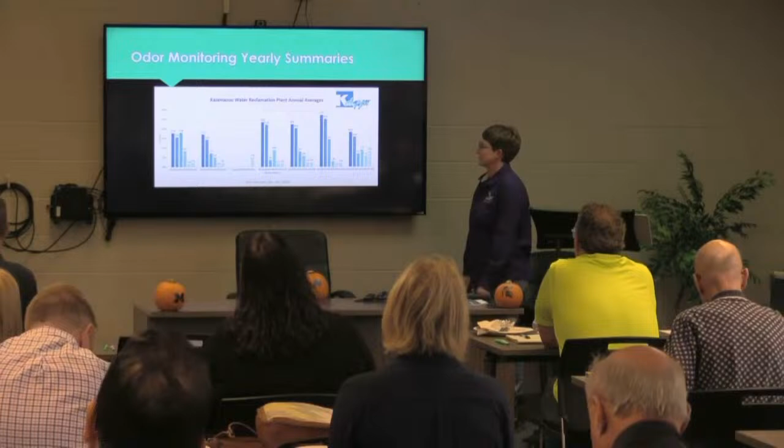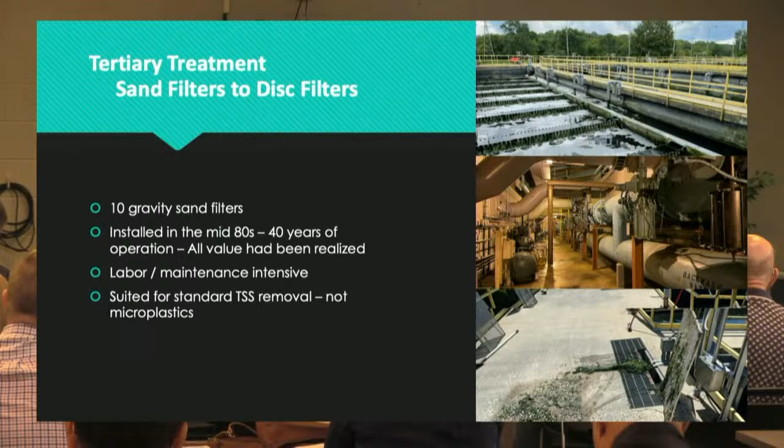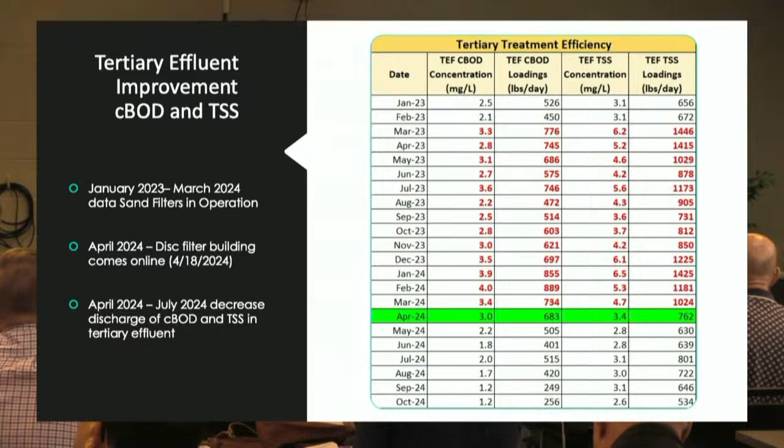That's all I have to share with you today. Thank you for listening. Here's my contact information in case you have any follow-up questions to what I presented today, and I'll turn it back over to James. All right, well, thanks, Susie.

This really concludes our presentation today. We want to make sure everyone's got all the information so you can share that with your stakeholders, your teams, your plants, your communities, and take that back in preparation for our recommendations to the City Commission. As we talked earlier, we're going to have a public presentation on November 12th at 5 p.m. to the Kalamazoo City Commission. It's going to focus on wastewater, not so much of a deep dive as we did today, and we're also going to include water, so it's a bit of a higher level presentation. We're going to be making ordinance recommendations to the Kalamazoo City Commission on November 18th, and then at the meeting on December 2nd as well. We are recommending that these rate packages be effective on January 1st, which would coincide with an annual rate increase.